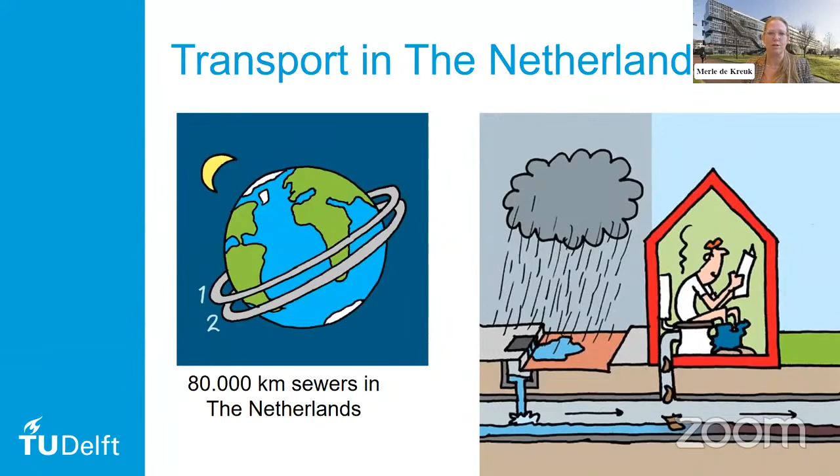So let's first give the picture from the Netherlands to see what my background is and what the infrastructure here looks like. We transport everything with sewers, 80,000 kilometers of sewers in the Netherlands, and that all transports our sewage to central wastewater treatment plants. We have quite some sewage treatment plants, 350 for 17 million persons.

So that's always the question, is it actually centralized sewage treatment or decentralized? Even though the sewage treatment plants are not so connected, every sewage treatment plant is actually treating the wastewater of a certain area, and therefore it is also vulnerable, because if one treatment plant is not working well, then we immediately have pollution on the surface waters. So this is something we're thinking about. How can we change it? I will come back to that in the presentation a little bit, the centralized versus decentralized, being more flexible in the sanitation and sewage treatment plant.

But moreover, this 5.3 million cubic meters per day that we are treating is a great resource for recovery and for becoming more circular, to increase circularity.

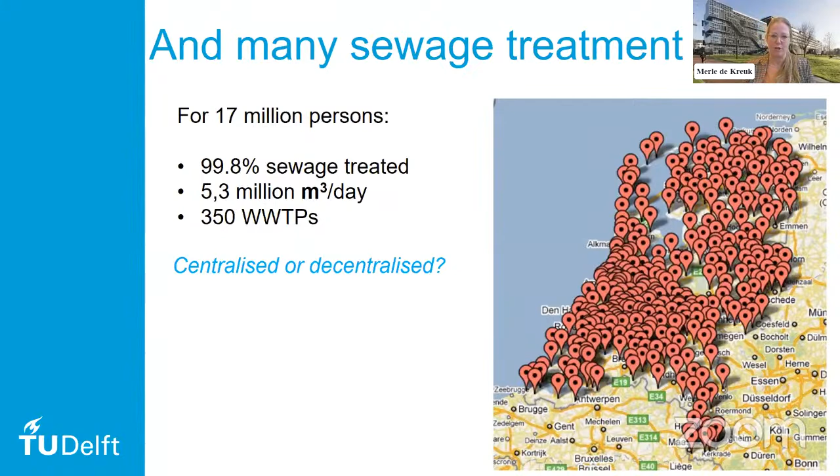To bring you back in history a little bit, there's been a focus change in sewage treatment over the years. In the last century, halfway through, we focused on COD removal because we understood we had smelling ditches and canals, lacking oxygen, with hardly any fish able to swim there. So something needed to change, and wastewater treatment started with just the removal of the organics and components that take up oxygen when released to the surface water.

Then in the 90s, the focus shifted to N and P removal to prevent eutrophication and algae growth in our canals and rivers. At the end of the 80s, underground wastewater treatment became popular.

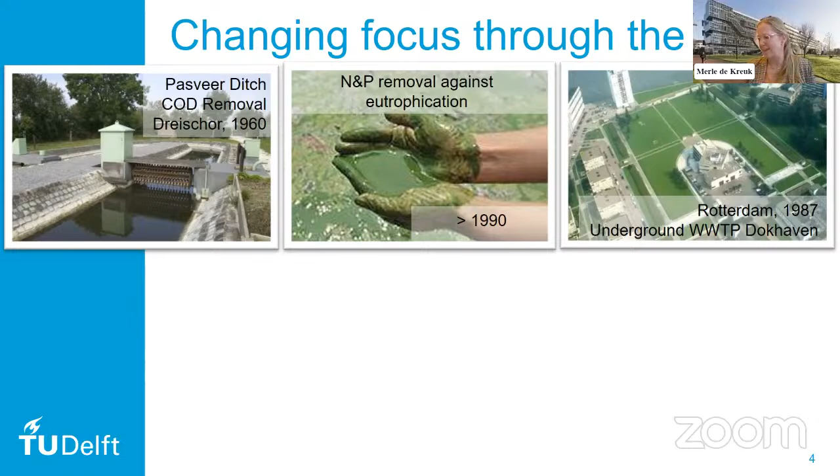Everything was supposed to be underground infrastructure, so we couldn't see it or smell it and could pretend it's not there. But I'm super happy that's changing, because if we don't see sanitation and wastewater treatment, we forget about it and the attention goes away. Underground building is also super expensive, so that was maybe not the best option.

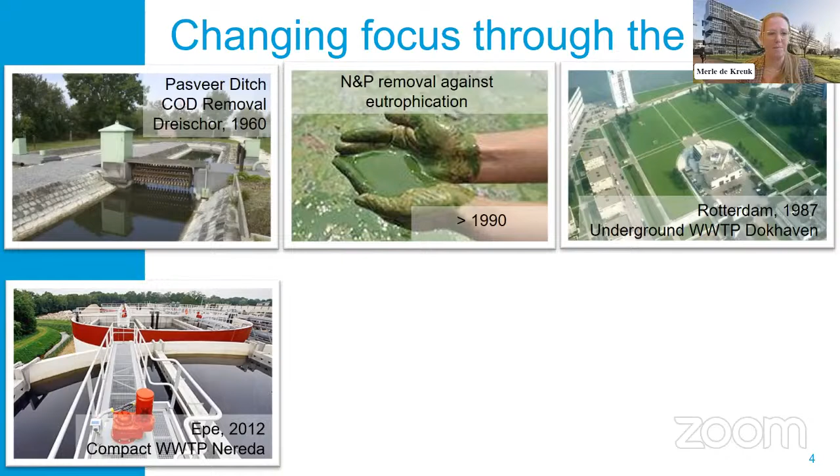Therefore the focus shifted to compact wastewater treatment. I will come back to this compact wastewater treatment that you see in the picture in a minute. From 2012,

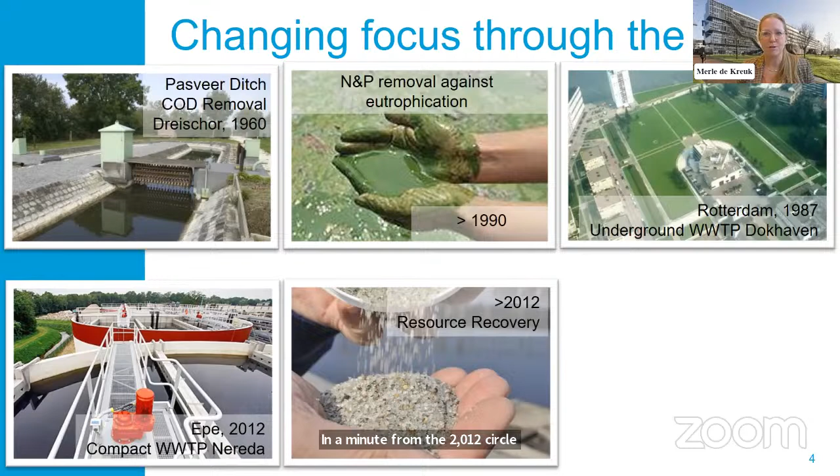attention to circularity in wastewater treatment started, so the focus shifted more to resource recovery. At this moment, also priority pollutants like micro pollutants, heavy metals, and microplastics are a concern. How can we really get super clean water?

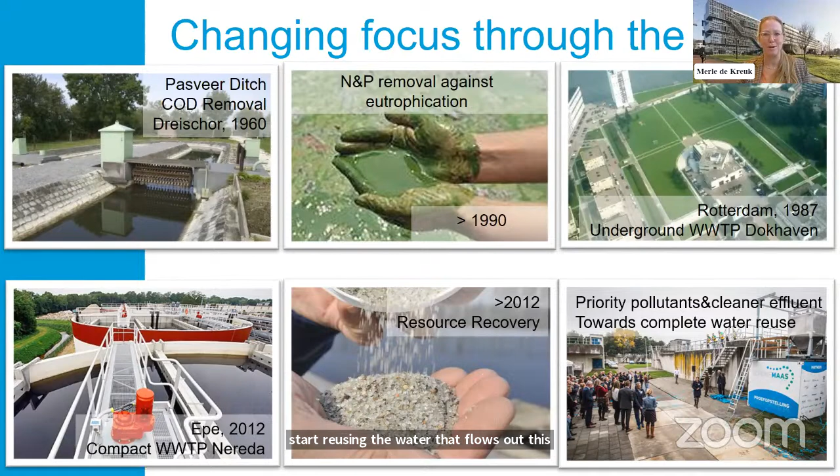So we can also start reusing the water that flows out - this 5.3 million cubic meters per day that flows out of our treatment plants.

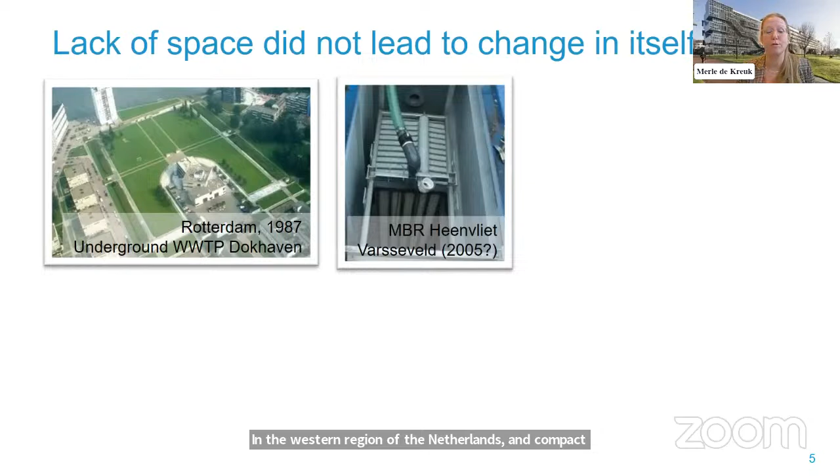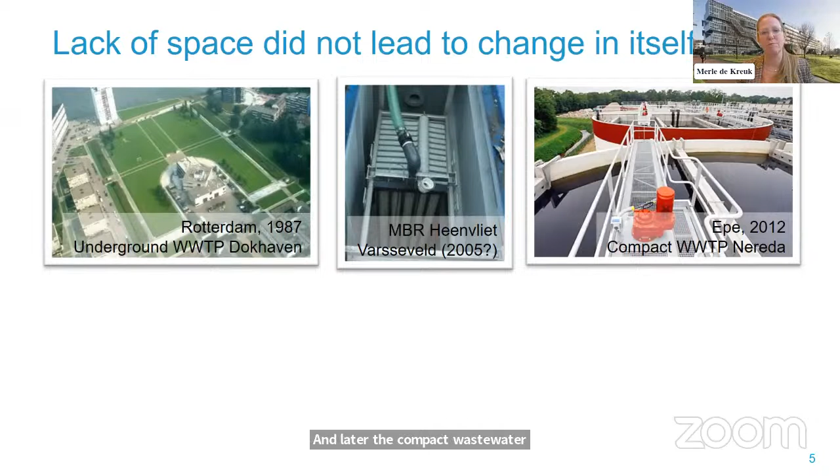This lack of space I was just talking about - underground wastewater treatment did not lead to change itself, and even land prices are super expensive in the western region of the Netherlands. Compact technologies were there to apply, like membrane bioreactors, and later the compact wastewater treatment plant, aerobic granular sludge or NEREDA. They were built, but not with great enthusiasm.

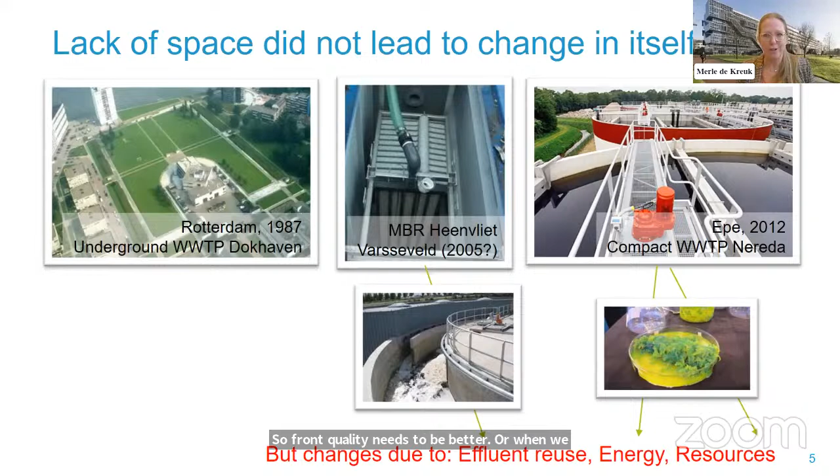Actually, the enthusiasm for change came either when we got other legislation - stricter legislation requiring better effluent quality - or when we realized there's a lot of cool materials in wastewater and sludge that we can get out. So there was an internal motivation from the water authorities to change.

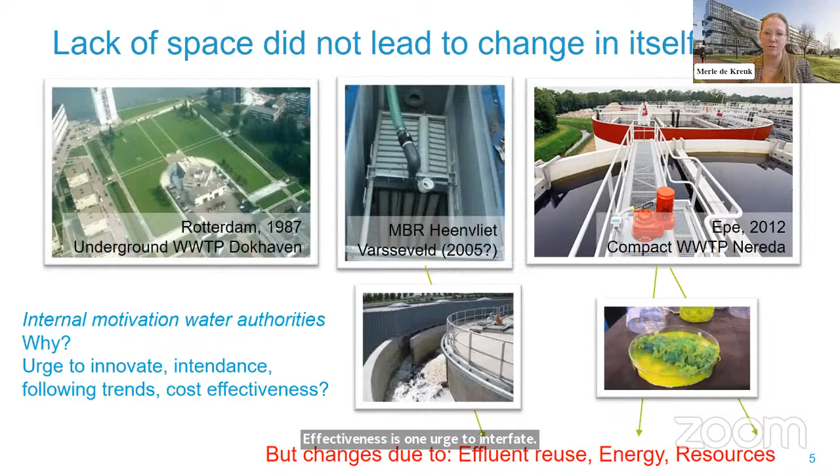And that was following trends - cost effectiveness is one, urge to innovate is another. So all these kinds of things led to the research and attention we had for resource recovery.

Also, we would like to reduce the materials that we use for building our wastewater treatment plant. If you go to compact building, there's less construction material needed. There are different things to this, and reuse.

I will come back to that. If we build more flexibly, we might be able to reuse elements at other places when treatment is more needed there.

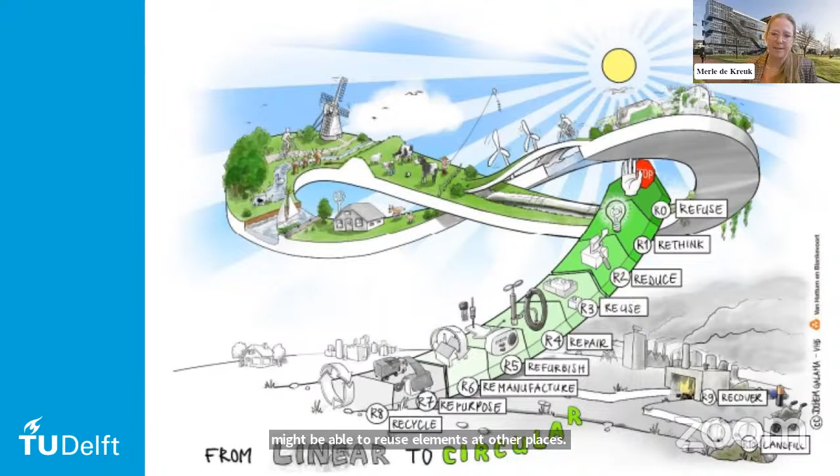So first, to dive a little bit into compact treatment - and this has been my own hobby for 20 years, it was my PhD and postdoc research, and I'm still working on it - compact treatment of wastewater with aerobic granular sludge. I abbreviated it here to AGS.

Usually we treat wastewater biologically with bacteria, and bacteria tend to grow in very open floc structures, and they settle very slowly. That's why a wastewater treatment plant needs such a big space, because all these big final clarifiers to separate the clean effluent and the sludge take a lot of space.

We thought that could be different. So we were able, in the lab and later at full scale, to grow this bacteria in granules. You can compare it to snow and hail - it's both frozen water, but hail really hurts when it touches you, and snow gently goes towards the earth. Well, that's a little bit the same with these different biomasses.

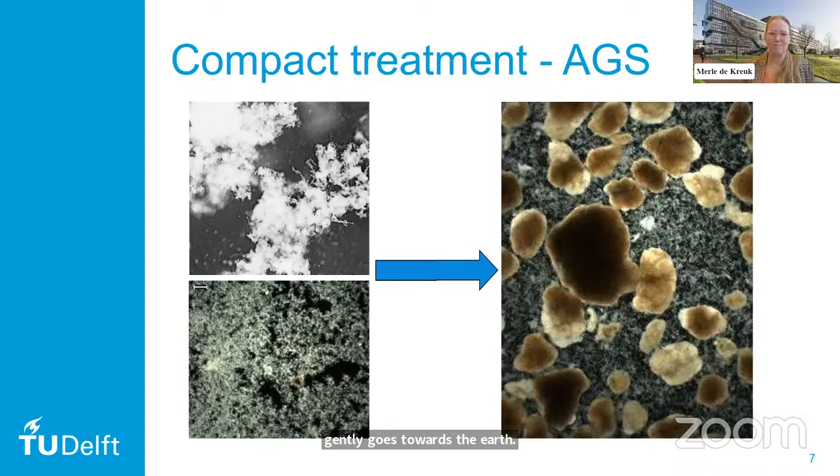But these granules are pretty unique. They have a layered structure. In normal treatment plants you have different tanks for the different biological processes. In aerobic granular sludge, it can all be done in one granule, so the design can be super compact, with low investment costs and low energy use because you don't need big recycle flows. All the biological processes happen in one tank. It's pretty unique, and it's already applied all around the world.

The 101st system was contracted a couple of days ago, so it is really picking up.

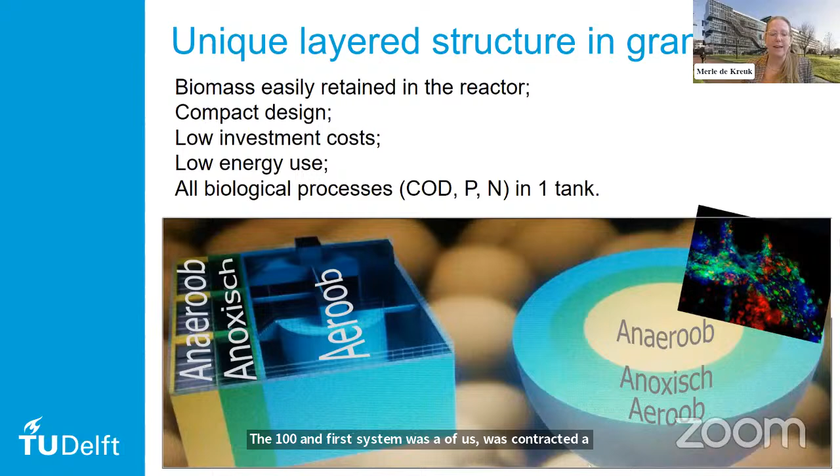Here you see a conventional wastewater treatment plant with these big clarifiers, 48 meters in diameter. These 8 clarifiers are just to separate the biomass from the water, from the clean effluent. Here you see an aerobic granular sludge system, and in perspective this is just 41 meters. This plant treats the same amount of water as the big plant. This is in the north of the Netherlands.

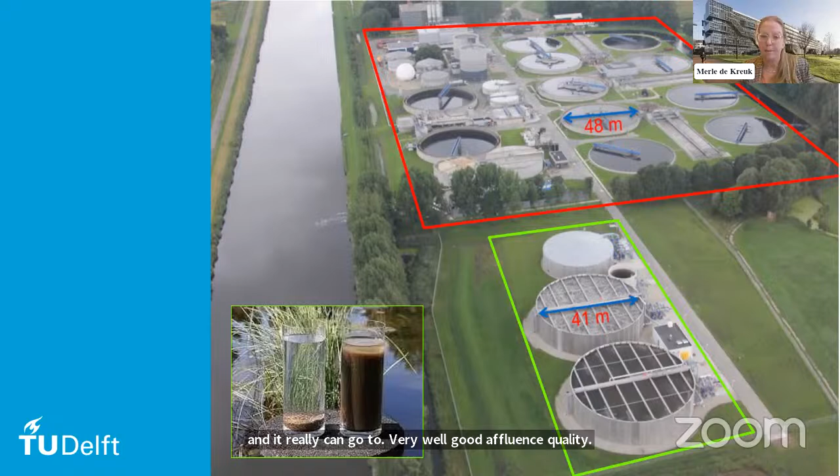This illustrates why, from a sustainable way of thinking, it uses less energy and can still achieve very good effluent quality. Also, the construction costs are cheaper and less building material is needed. So that's a big advantage.

Then we speak about resource recovery. There's a super cool resource in aerobic granular sludge called Kaumera. Kaumera is actually the EPS that binds the bacteria together. In these granules you can extract that, and this Kaumera, these extracellular polymeric substances, sorry to be a bit technical.

It's a kind of slimy material, and by treating it differently or mixing it with clay, you can tweak the characteristics a little bit, so it can either repel or absorb water. If you mix it with clay, it can be used as a flame retardant, and a very thin layer can really hold back temperature from 1,000 degrees - 1,000 degrees on one side, and it's normal temperature on the other side with just a thin film. So it's really an amazing material that didn't exist before, or at least wasn't discovered.

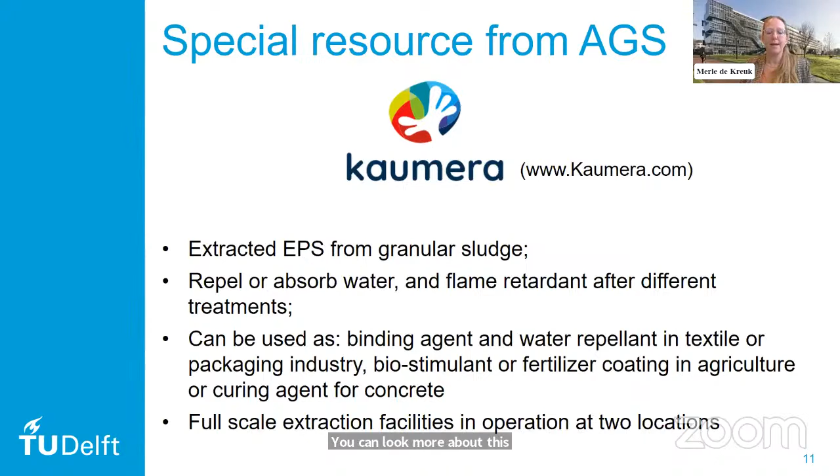We already have two full-scale extraction facilities in operation in the Netherlands, at two locations, and now we're seeing where we can apply all this Kaumera gum, as we call it - the possibilities are really many. You can look more about this material on the website, and there's also a very nice movie about what you can do with it.

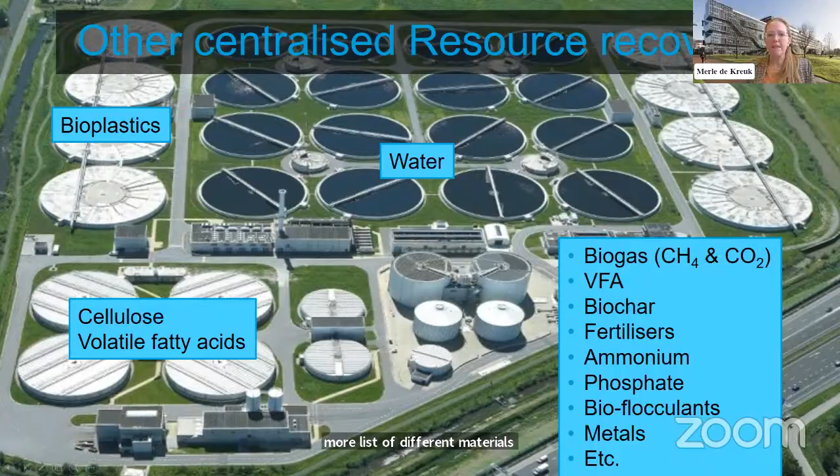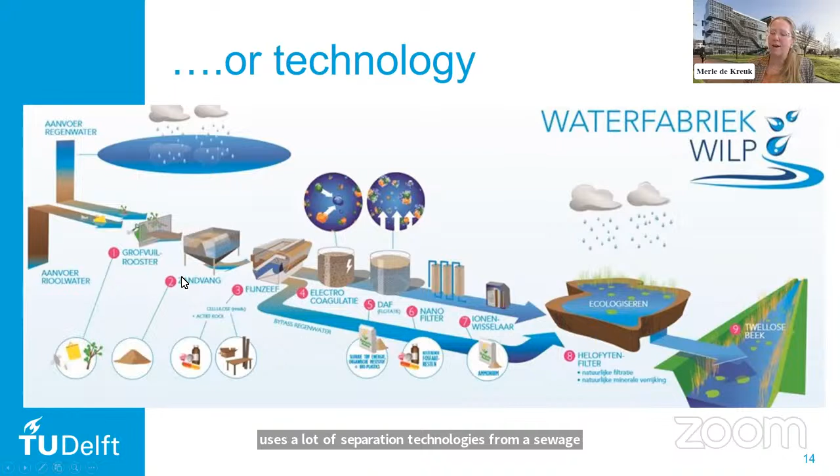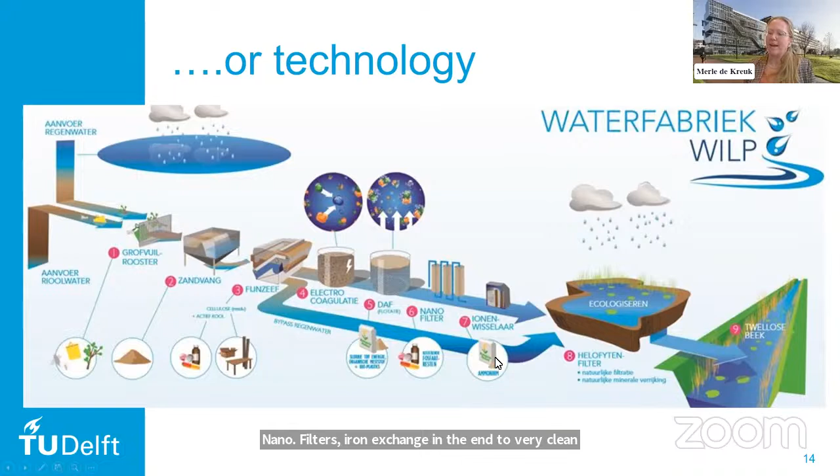So you could either use ecology or you can use technology. This is an example from Waterfabriek Wilp that uses a lot of separation technologies from sewage - via screening, a grid and sand removal, a fine screen, electrocoagulation, dissolved air flotation, nanofilters, ion exchange - in the end producing very clean water. There's no biology involved in this system.

At every location you can extract resources - from extracting the sand in the sand and grit separation, to the cellulose in the fine screen where you can make all kinds of products, but you could also, in a nanofilter, remove medicine. I'm not sure if you can reuse that, but at least in the end the water is very pure coming out of such a system, and you could reuse it.

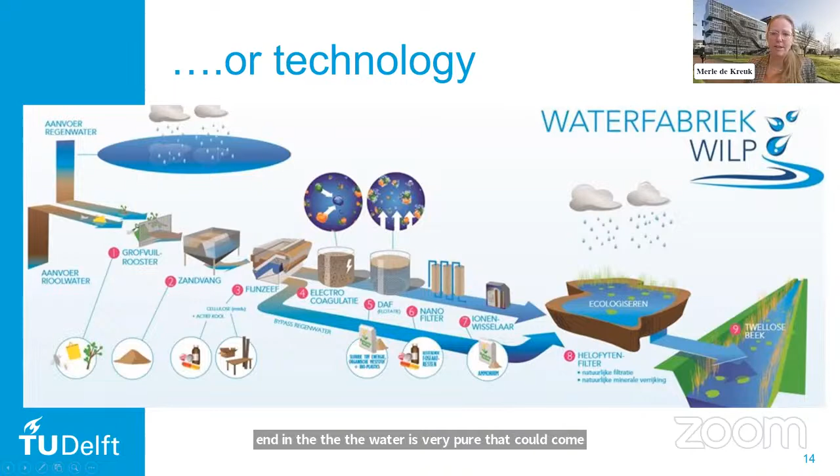Well, the focus of our water authorities currently is on phosphate, which can become struvite - phosphate together with magnesium and ammonium that you can use in the fertilizing industry straight away - or vivianite, which is a new thing. The nice thing about vivianite is that magnetically you can remove and recover it, and that is an iron phosphate.

Cellulose, as I already mentioned, bioplastics, energy coming out of the sludge digestion - this Kaumera, CO2 and water. The nice thing about this is that you don't need a lot of adjustments to the normal activated sludge system we all know about, but you can just add additional installations to recover these materials and become more circular.

The only thing to keep in mind is that sometimes you need collaboration in the vicinity, like with CO2. There's a lot of CO2 coming out of a sewage treatment plant, especially if you use the biogas in a combined heat and power system. Here in the Netherlands, we have a treatment plant that does that, and next to it is a greenhouse area, so they can immediately bring the CO2 to the greenhouse area and stimulate plant growth over there.

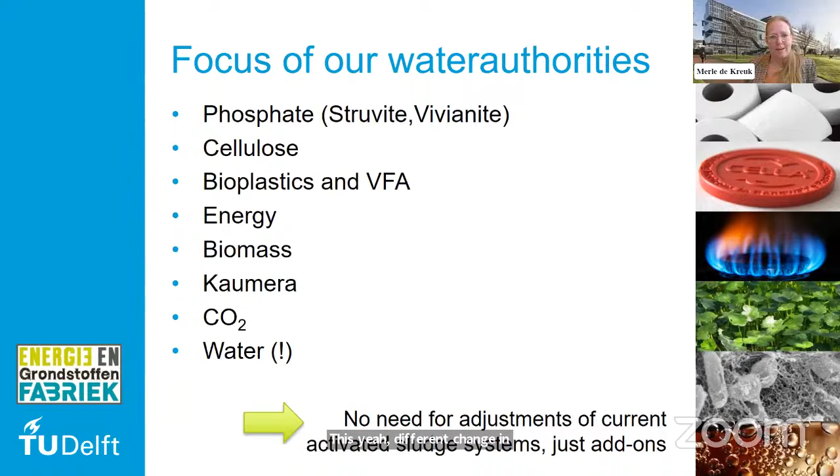You could either make money out of it, or like with the Kaumera, sell it to industry, but also become more sustainable, more circular, and more autarkic in the end. Another good thing is that with this resource recovery, you can work in collaboration with the different people around you.

So in all cases, you can prevent spending too much money. And another thing that I think is leading in the choice of resource recovery is that it can help you prevent a lot of maintenance.

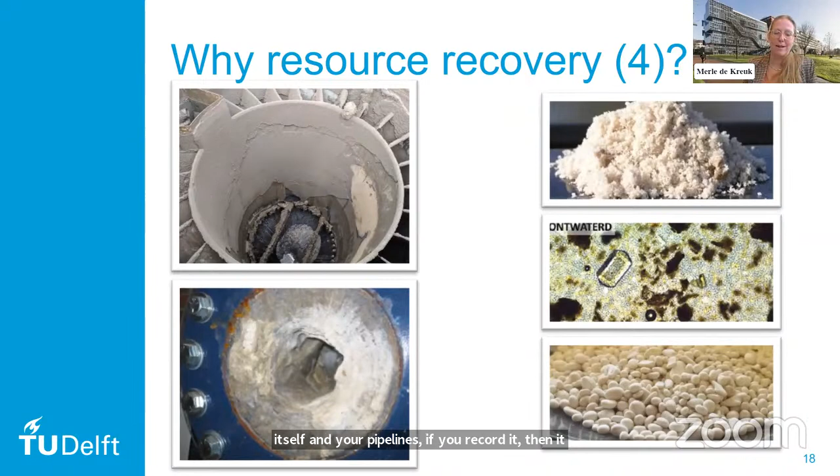So this is struvite recovery to recover the phosphate from wastewater. If you don't do it, it leads to a lot of precipitation of phosphorus in your equipment and pipelines. If you recover it, it cannot precipitate anymore on unwanted devices, and you can also use it as a fertilizer. So that's a win-win.

The fifth why for resource recovery in the Netherlands is because sludge incinerators are at end of lifetime, and we need new technologies for sludge treatment. So that is a stimulus to rethink what we should do with our sludge, because if you do biological treatment, you always have this sludge. We would like higher digestion efficiency, to generate more biogas, produce the gas ourselves, and become more independent.

You could also go to total sludge degradation, meaning pyrolysis or torrefaction. The good thing is that you generate a biochar or hydrochar that you can use as a soil enhancer, plus with pyrolysis you create a syngas that you can use in industry to make components in the chemical industry.

Resources from the sludge include the biochar I mentioned, but you could also look at recovery of precious metals, maybe not in sewage treatments, but if we decentralize and treat certain wastewater flows, that could be an option, as well as nitrogen and phosphorus, biogas, etc. In sewage treatment plants there's always sludge production, whether biological or chemical sludge depends on the treatment we choose in the future.

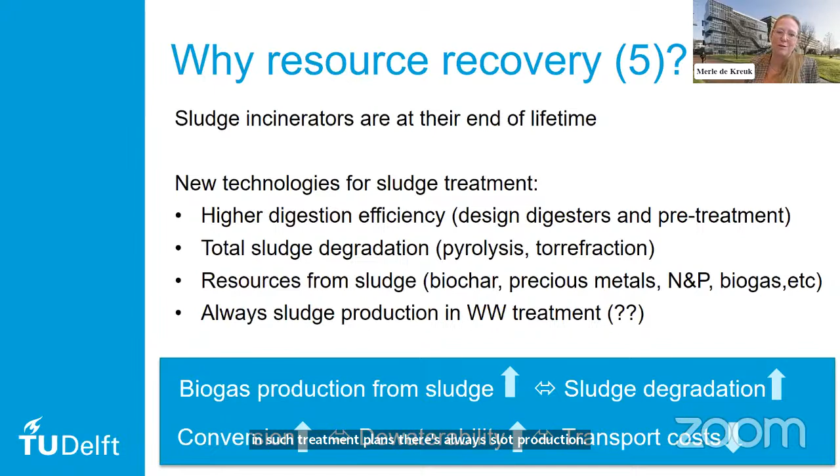But there are quite some challenges if you go from sewage to tap. These challenges are technology, still the robustness and cost, but mainly monitoring. So how can we guarantee the quality you want flowing out of the tap? Don't people get ill from it?

Well, of course there's impact on the water system, acceptance and behavior, and also collaboration, because the wastewater treatment plant owners have to collaborate with the drinking water suppliers, and that is also an institutional choice that you have to make.

I spoke now about centralized treatment, but there's also decentralized treatment for easy resource recovery, and sometimes decentralized treatment also solves the problem of a small area or a small community.

I put some examples. I really like the example of PharmaFilter, a Dutch company that treats especially hospital wastewater, because there's a lot of medicines in hospital wastewater, and if you treat it separately you prevent these materials from going to the environment. In the meantime they also solve a waste problem, because they put all the organic material, etc., through this PharmaFilter, and produce biogas out of it.

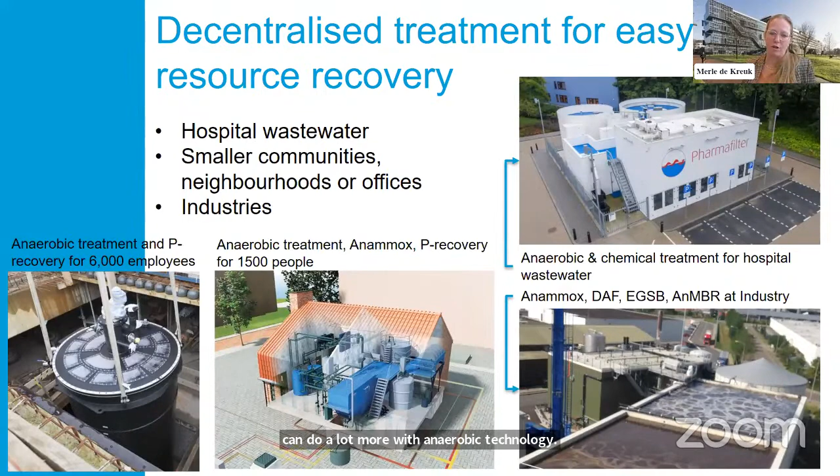The advantages of decentralized treatment of sewage is that you can treat it closer to the people. So if sewers are a problem or there is no sewer system, then decentralized treatment could be a good option. You could also use it to beautify the city, letting grow a lot of flowers and plants if you treat the water. An example is given here.

You can have separation at source more easily, so have your rainwater, your sewage, your hospital water, your industry water treated more separately, and with that also in a more sustainable and more efficient way.

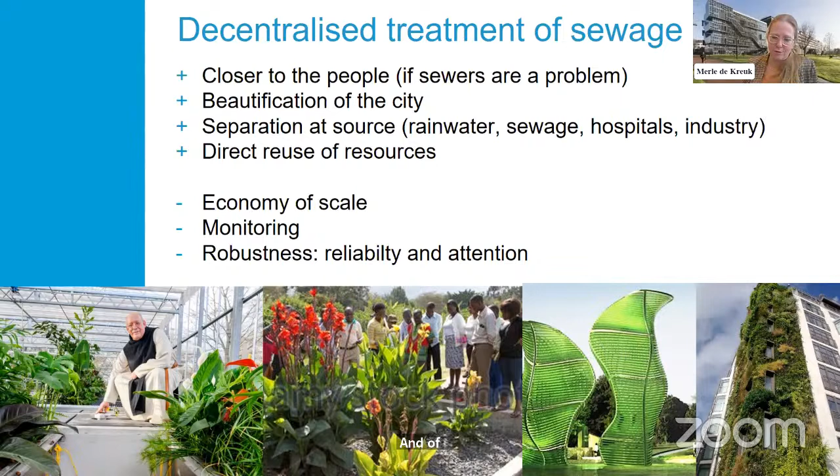And you can reuse your resources directly because you're closer to the place where you could use them, like with water. But there's always an economy of scale, so a lot of these small treatment plants might become more expensive if you go to high technology treatment. And especially monitoring is more difficult, because then you have to monitor a lot of plants instead of one big plant. And all these small treatment plants also need attention to function well, so that might also be a difficulty.

Well, then I would like to end with an example of decentralized flexible treatment and recovery in New Delhi, India, where there's no or hardly any sewer infrastructure, and all the sewage goes with open drains to the rivers.

There we are developing a treatment that is based on recovery. So we try to first have an anaerobic treatment where we can produce sludge and biogas. The biogas can go to a solid oxide fuel cell to make electricity with high efficiency. Then a phyto-urban filter, kind of a wetland in a more compact way, to grow flowers to beautify the city, or to use the water from the anaerobic treatment in photobioreactors to make microalgae that can be used as fertilizer. And then the water that flows out can be upgraded to different types of usable waters, so irrigation, industrial, or potable water.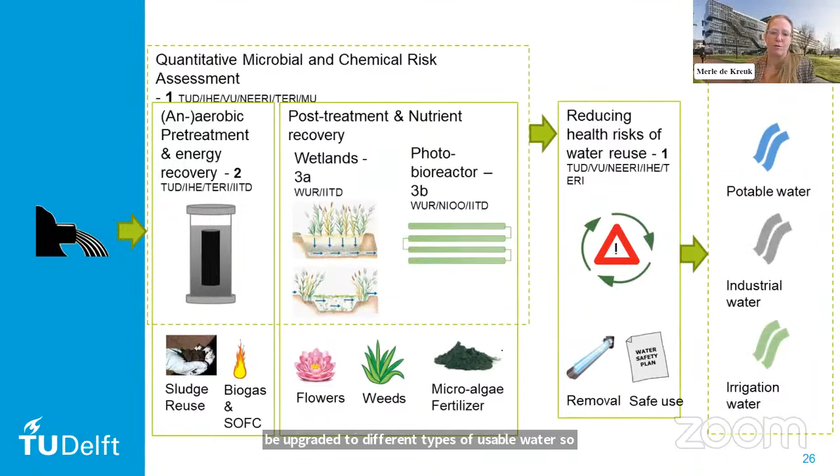What we try to do here is make a kind of toolbox of different technologies that you could couple to reach the water quality needed at a certain area. So in that way, make it also more flexible.

So to summarize, there are many different options to add resource recovery to existing conventional wastewater treatment. But also for new wastewater treatment plants, there's an even broader range of technologies you could apply. The technology is available to couple wastewater treatment and drinking water production, but the willingness is the big issue. Are people willing to drink that water? Are people willing to use the water?

Physical-chemical treatment is being developed, but is still quite costly, though that might change in the future. Biological treatment is efficient, but produces a waste sludge. On the other hand, the waste sludge is a treasure for recovery. And flexible building could be added as a sustainable option because of the building material and reuse possibilities.

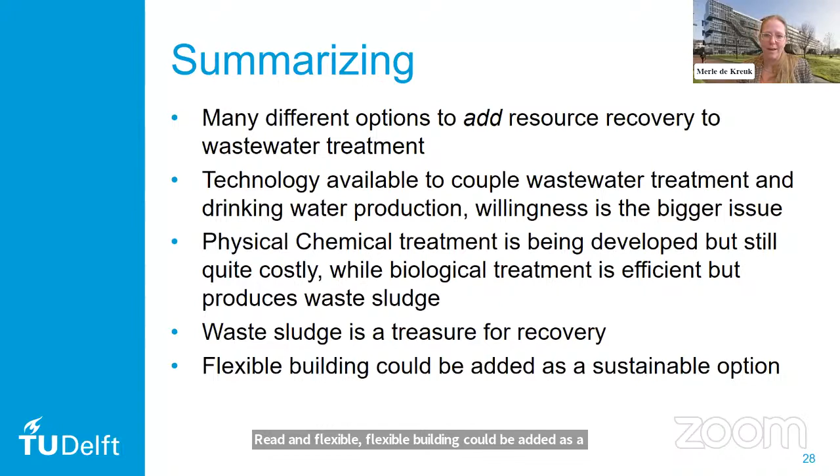So those are my take-home messages. I hope it inspires you a little bit to think about the future and what is all possible with wastewater, the dirtiest thing we produce, as it's often perceived. Thanks for the attention.

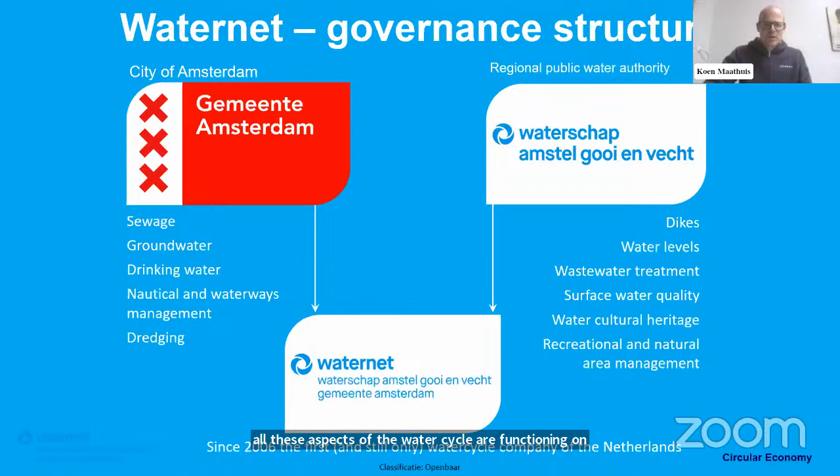This second slide gives an overview of whom we do these services for. We have the municipality of Amsterdam, which is responsible for the drinking water, but also for the sewer system - so they are one of our boards. And the other board is the Regional Water Authority of Amstel, Gooi and Vecht, and they are responsible for the dikes and the water safety and also for the wastewater treatment. Waternet is an association with 2,000 employees, making sure all these aspects of the water cycle are functioning on a daily basis. So we're a public water organization - that is important to remember.

Sustainability and circularity is very important to us. As you can see on the right side of this slide, there are many ambitions on a global level and on the European Union level. The Dutch government has expressed their ambition to become circular in 2050. And also our two boards, the Municipality of Amsterdam and the Regional Water Authority Amstel, Gooi and Vecht, have high ambitions on circularity and sustainability. Of course, there's also a huge need to be more sustainable and to become circular, as climate change is striking heavily over the past 10, 20 years.

Resources are drying up, especially when it comes to clean water availability. And it would surprise you that also in our delta country, where you would think water is plentiful, over the past 5 years, especially in summertime, we have had 3 very dry summers in which fresh water was really becoming short. We were falling short of fresh water, and this really triggered again the need to make a change to a more sustainable and a more circular economy.

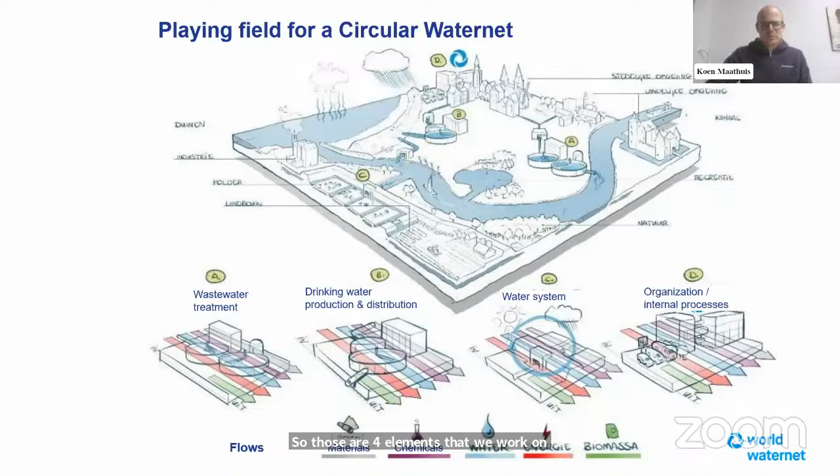Again, a short picture of what Waternet is doing. Under number A is the wastewater treatment, B is the drinking water production and distribution, C is the water system, so the dikes, water quality, water quantity management of the canals and the rivers. Number D is the organization and internal processes of our buildings, trucks and cars. So those are the 4 elements we work on when making Waternet more sustainable and more circular.

The initial ambition of our two boards, the Regional Water Authority Amstel-Gooi and Vecht and the Municipality of Amsterdam, were formulated as becoming 100% circular, to not have any waste and reuse all the waste that we generate, or all the products that we generate.

As we were developing our strategy and our program on the circular economy, we have been reflecting, and we thought, okay, recycling is important, but in the process of recycling, you might also harm the environment by using a lot of energy to reuse steel, for example, or reuse concrete. You need a lot of energy to recycle that.

So while analyzing this goal, this ambition to be 100% circular, we transformed the goal into reducing environmental impact. We think that we are fully sustainable when our impact on the environment is zero. So in the elaboration of our strategy, we have decided to say, in 2050, Waternet wants to have an environmental impact of zero. That means for everything we build, all the treatment plants, all the sewer systems or pipelines that we put into the ground, but also to operate and maintain this system. So all the fuels, all the chemicals that are needed to operate our systems and plants, all this together should have an environmental impact of zero. That is what we are working on.

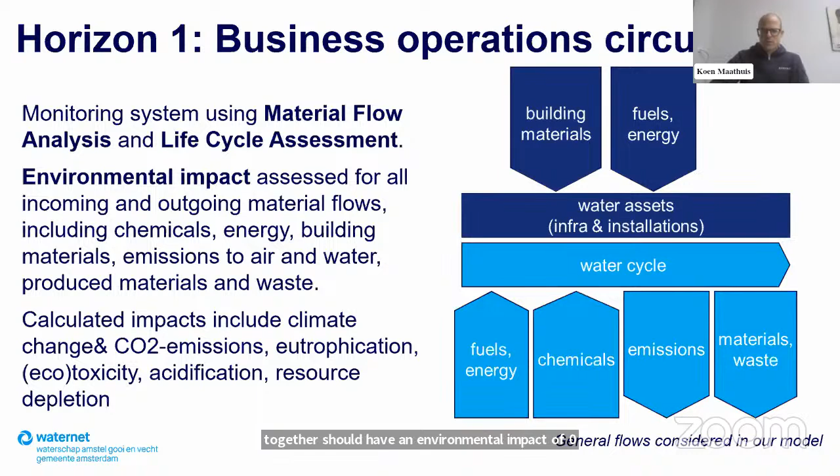But there are aspects that are even more severe on the environment, and that is the total nitrogen emission, the total phosphorus emission, and also the COD emissions. Those three, together with greenhouse gas emissions, are all, or the majority of that, produced in our wastewater treatment plants. So if you look at all the activities Waternet is responsible for, our 11 wastewater treatment plants in the Greater Amsterdam area are the ones we really need to work on to reduce our environmental impact.

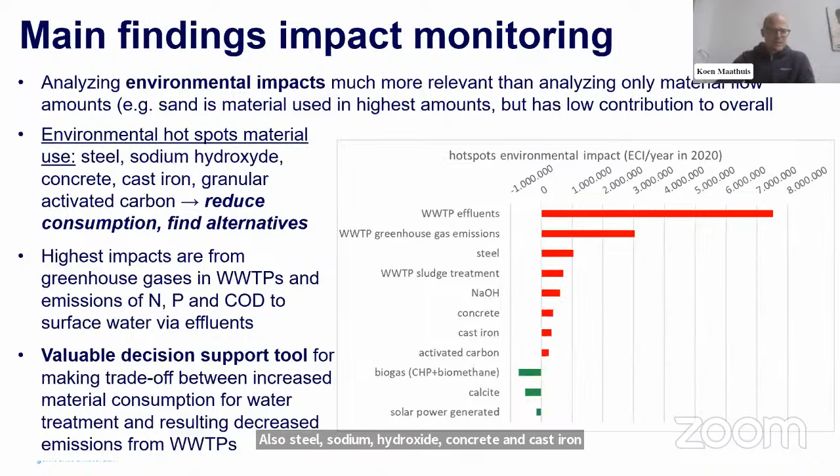Just to conclude on that first horizon, our internal processes - we are going to work on, for the coming years, reducing the COD, the N and the P in the effluent, and also further reducing the greenhouse gas emissions.

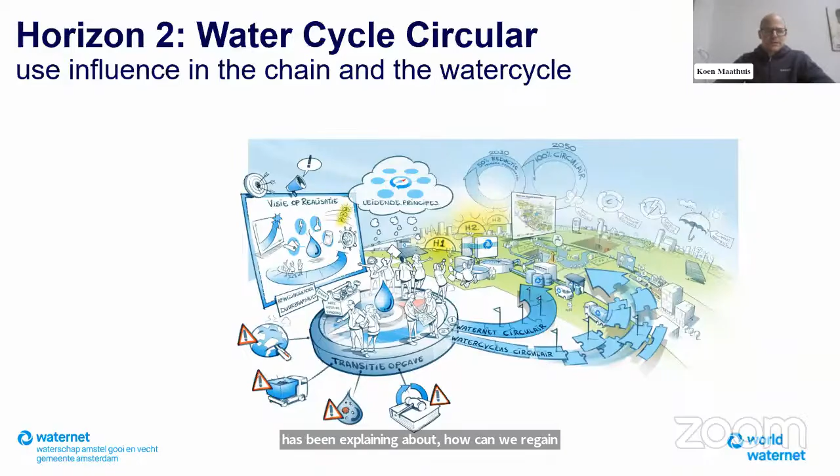Now, if we look to horizon number 2, the water cycle circular, then we get back into the topic that Merle has been explaining about - how can we regain materials from our wastewater? I just want to give a small insight into our biggest wastewater treatment plant. This is the wastewater treatment plant in Amsterdam West.

I was just mentioning 1.2 million people living in the greater Amsterdam area. 800,000 of these people divert their wastewater into this wastewater treatment plant, treating 800,000 population equivalent.

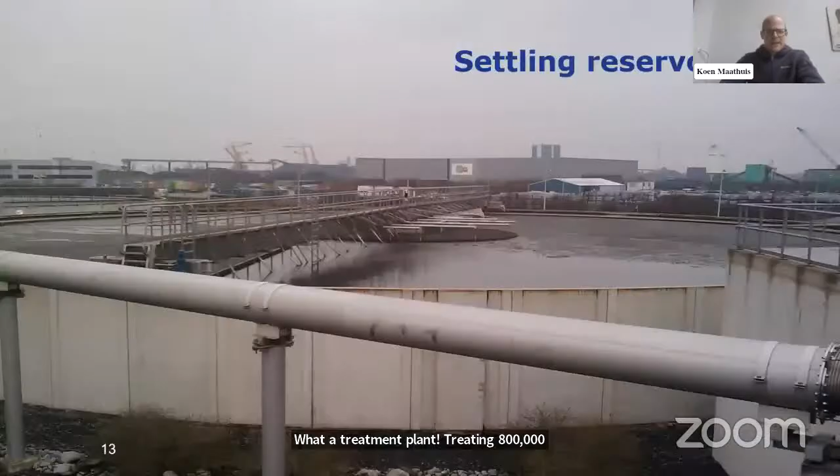It's an activated sludge system. I'm not a wastewater treatment expert, but I think that's a generally accepted wastewater treatment methodology. It looks like this.

And here is the process chart. I've been finding the English terms. It has a primary settling tank, an aeration tank, and a secondary settling tank, after which the effluent is disposed into the surface water.

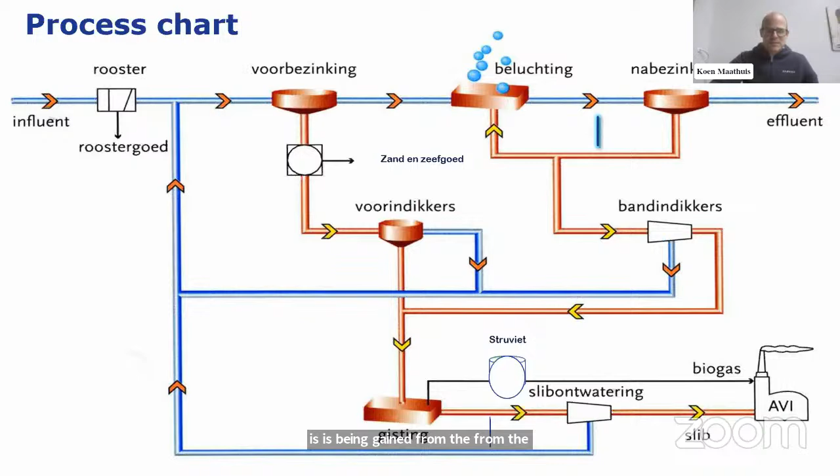But at the same time, in this parallel process, we are producing biogas out of the sludge, and also struvite is being gained from the sludge. It was already mentioned by Merle that this is one of the products that can be gained from wastewater.

Some other products that can be recovered from wastewater are cellulose and calcite, which is recovered from drinking water, and also thermal energy can be gained and recovered from effluent.

It's interesting what Merle was just explaining about the reasons for recovering resources, because for Waternet, regaining phosphorus as struvite from the wastewater was not — there was not a clear business case for this.

The pipes of the wastewater system were clogged by phosphorus. There was precipitation of phosphorus into the pipes, and this was causing a lot of technical problems and maintenance cost. So that was the reason we had to rethink how we could gain and recover phosphorus from the system so that it would not clog our pipes. That was actually the reason we started to recover phosphorus from our wastewater treatment plants.

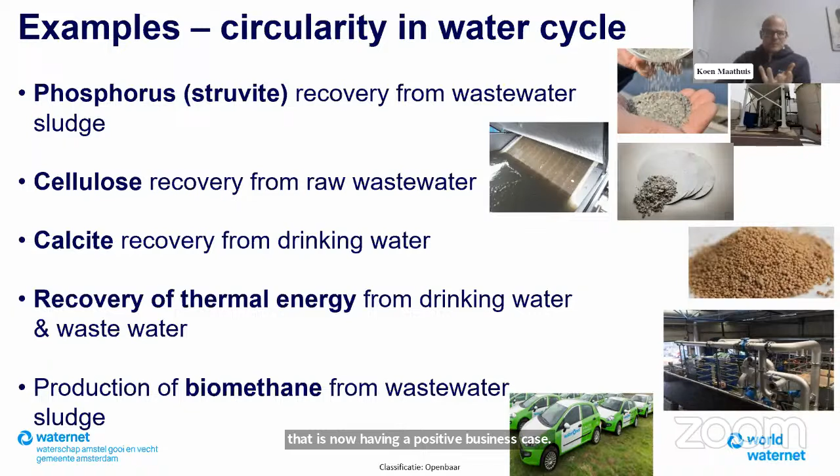So, another source to recover is water. It was already mentioned by Merle, and this is becoming more and more important. Waternet is now working on effluent as a source for industry water. I was already mentioning that over the past 5 years, 3 extreme summers were recorded, causing freshwater shortages.

And at national level, we are rethinking how to make our freshwater resources better available for drinking water production. At this moment, you can see on the right side an image of the harbor of Amsterdam. The industry in the harbor of Amsterdam is using bulk water that is also used to produce drinking water.

We have decided as Waternet that we want to shift from bulk water to effluent water. Our wastewater treatment plant that I was just explaining about is in the middle of this harbor area. It is producing an abundance of effluent, which is now diverted into the surface water and later into the sea. It's a precious source of fresh water.

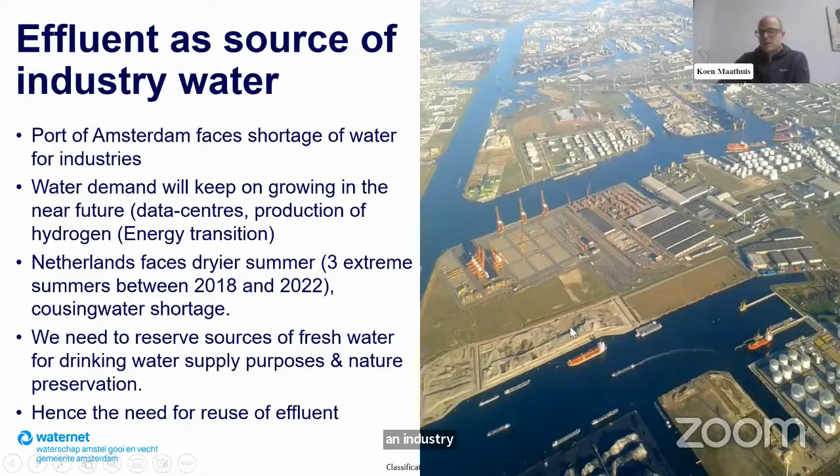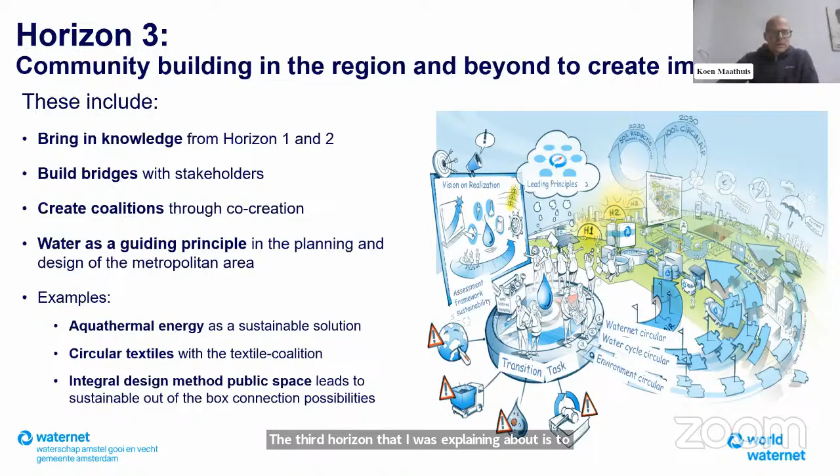The third horizon that I was explaining about is to facilitate the region in becoming more sustainable and more circular. One of the interesting examples is the textile industry. The hospitals in Amsterdam are using 5 million disposable plastic coats every year, producing a lot of waste and CO2 impact.

The medical sector wants to shift towards reusable textile coats that can be washed. This is something that happens outside of Waternet, but washing 50,000 reusable and rewashable coats every year also has an impact on our wastewater system.

So we are involved in this process. We're a member of this working group to make sure that this transition from disposable plastic coats to reusable textile coats will not have a major negative impact on our environment and on our wastewater treatment systems.

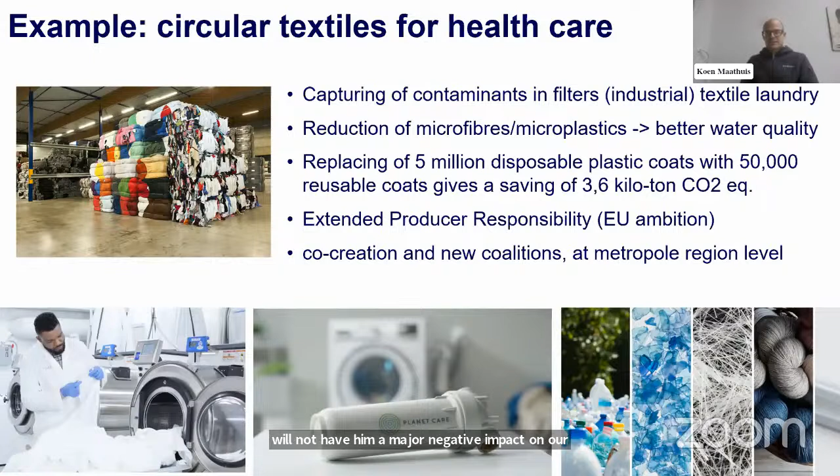Well, to summarize, Waternet as a public company has a unique role in the complete water cycle in the Amsterdam area. Our primary goal is to reduce our own environmental impact with the activities and services we provide. At the same time, we're working in that water cycle to regain as many

elements from our wastewater as possible, and we also want to facilitate others to do that. And I haven't talked about that yet, but becoming sustainable, becoming a circular utility is a process of transition. There is not one clear road that leads us to 100% sustainability or 100% circularity. So we have to experiment, and we have to dare to execute pilots.